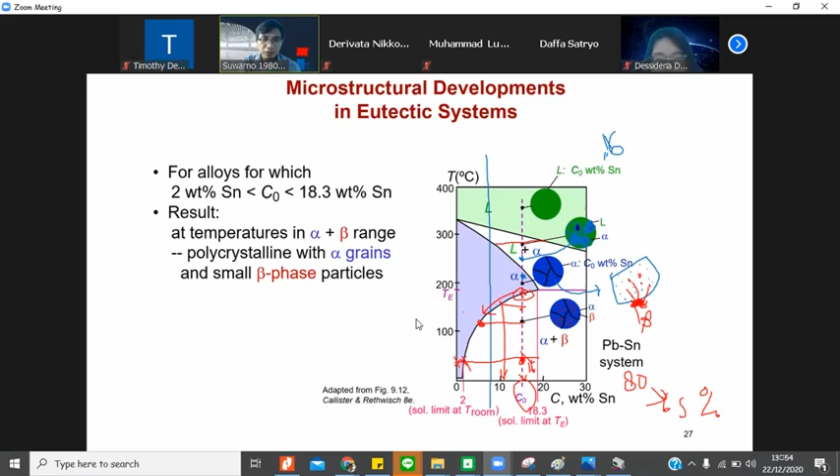Before we talk about eutectic, we come back a little bit to this copper-nickel diagram, and then we talk about the cooling curve. So what is a cooling curve? It basically tells you how the temperature decreases over time when some amount of alloy is cooled down. Okay, it is probably simple if you imagine something like this.

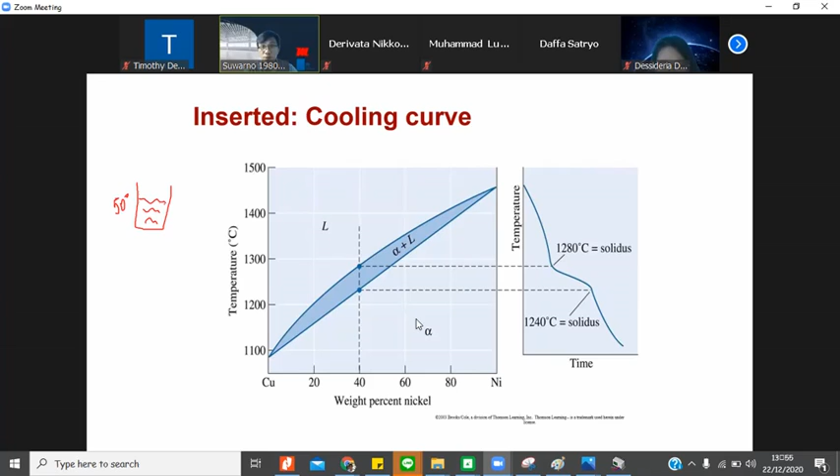So you have a glass of water, and this is about 50 degrees Celsius. And then you put a thermometer, or we call it a thermocouple in engineering language. In many engineering fields, people don't call it a thermometer; thermometer is for common use, but we call it a thermocouple. Thermocouple means a couple, because it's made of a couple of metallic things. It means you can measure the temperature here, in degrees Celsius.

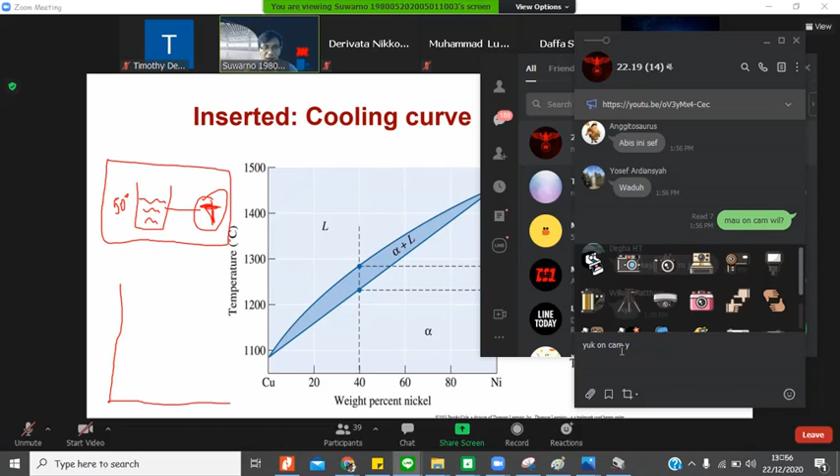So then I would like to make ice. I put this thing into a freezer, including the thermometer, or better, the thermometer is outside, something where you can read the temperature. Then I will make a graph telling me how the temperature progresses inside the freezer. So you have a plot: on the y-axis you have temperature, on the x-axis you have time. So this is a temperature and time diagram.

In the beginning, when it is started, it is 50 degrees Celsius. So then, when it is cooled down, you just monitor the temperature. It doesn't have to be manual; you can use a computer or programming. But let's say it's manual. You read this thermometer, and it tells you that it is 50, and then after 5 minutes it is 40. Every minute you record the temperature.

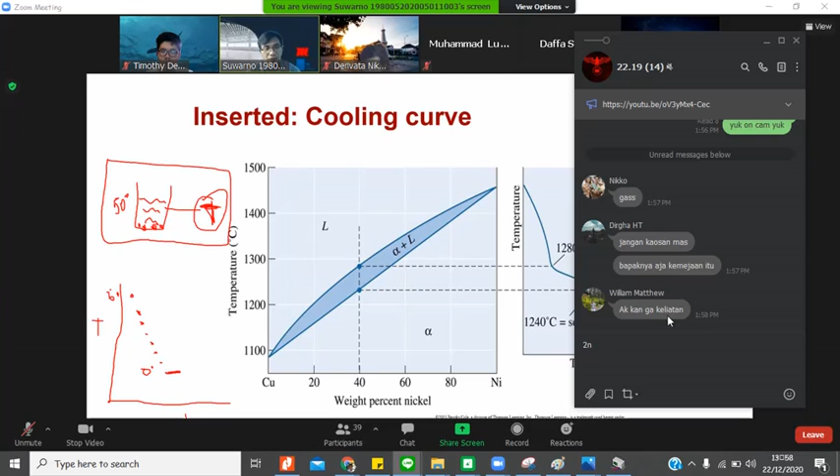It's cooling down: 50, 40, 30, 25, 20, 15, 10 and 0. This is the interesting thing. Whenever it is 0, at some point in your glass there will be ice formation, because 0 degrees is where ice starts to form. So what happens to your temperature now? After 5 minutes, you still observe the temperature is constant. It's still 0 degrees, no decrease of the temperature. And the amount of ice still increases, until 50% of your glass of water is now ice.

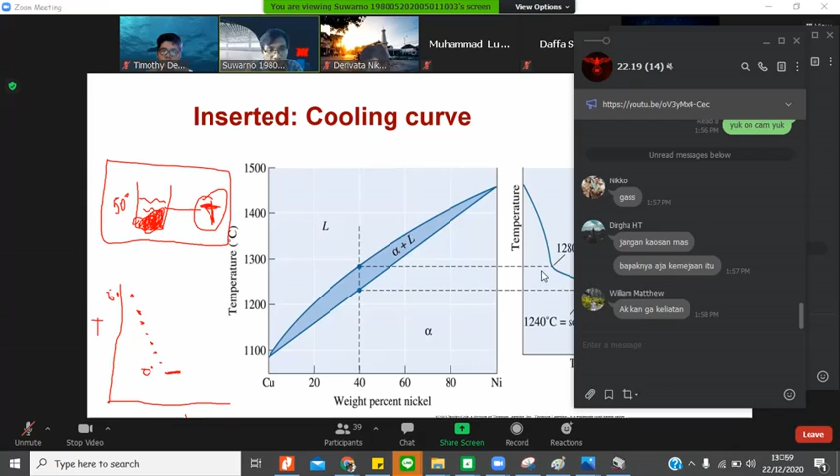Now my question: is the temperature decreasing, or is it fixed or constant at 0 degrees? What do you think? When you have a mixture of ice and water inside a freezer, when water is transformed to ice, do you observe the temperature decrease or stay constant? Constant. Yeah, correct. It's constant. Why? This is a phase transformation. During the phase transformation, the temperature is not going down.

It is still constant because it's pure. It's still constant until 100% of the water is already transformed into ice. Then it starts going down until minus 18 maybe, because the freezer is set to minus 18. So you have a diagram something like that.

So this thing, this curve, we call it a cooling curve. We call it the cooling curve of pure water. This is the cooling curve of pure water. If you have pure nickel, what happens? Liquid to solid nickel. Pure nickel is here. So this is pure nickel, this is pure copper.

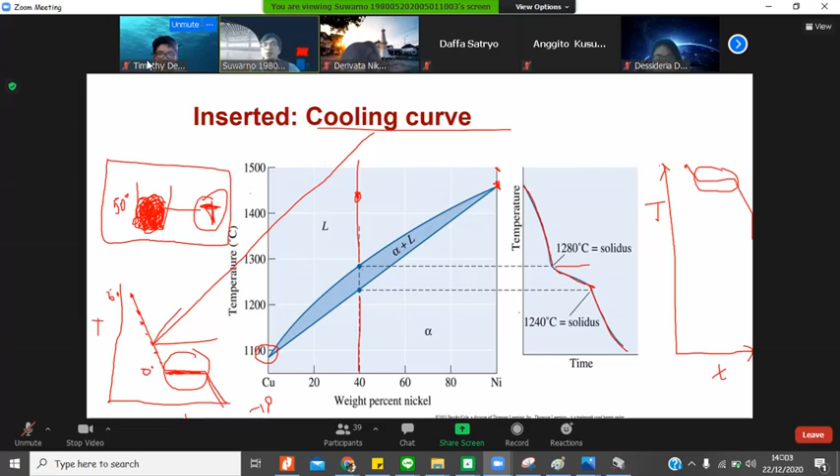So this is a cooling curve. Cooling curve tells you about the temperature progression during the cooling of a stuff. Or then you have a heating curve, when you heat stuff. Basically the same thing, not a big difference. Just monitor the temperature when you cool down something, a phase. It can be pure and can be not pure. Not pure means alloy.

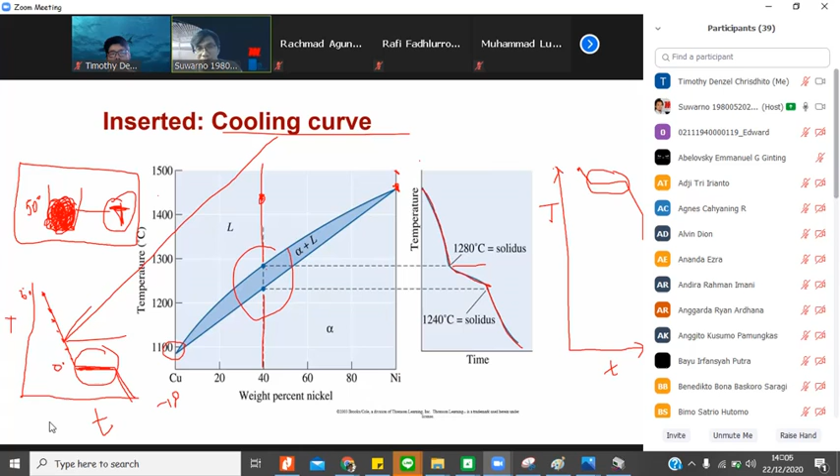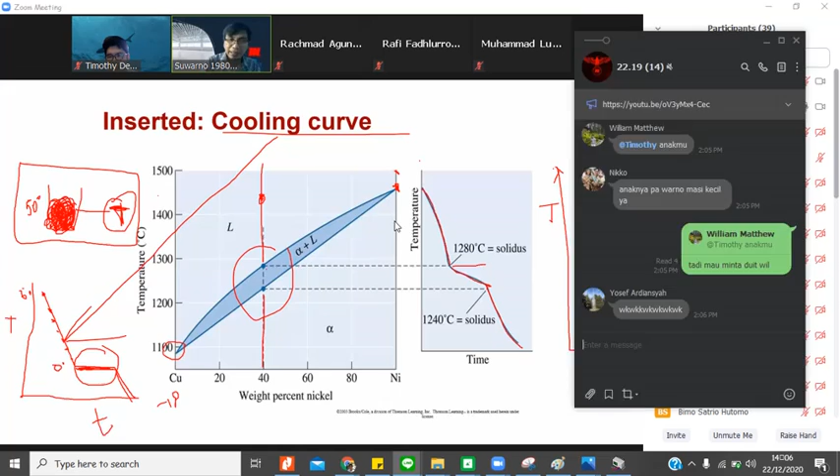So it will be constant at 100 degrees. There is no change because it's pure. Also, if it is condensed, then there will be some constant temperature, things like that. Okay, this is the same thing. I will not tell you. This is also the same.

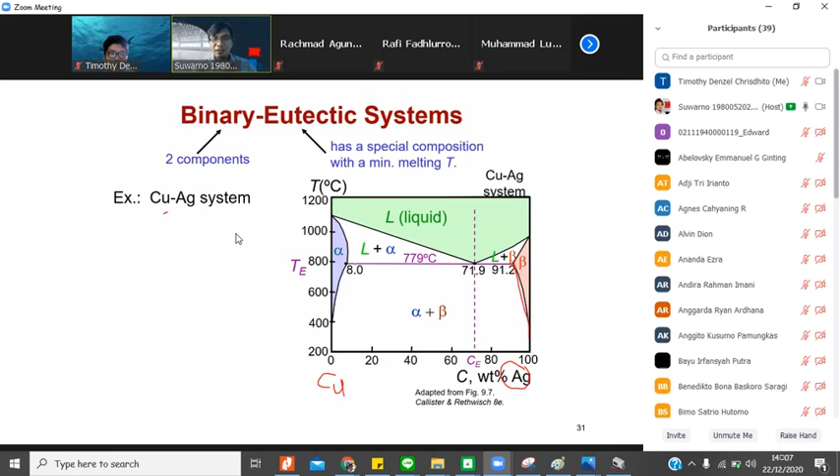So this is mainly copper on the left side, and then on the right side you have mainly silver with some amount of copper dissolved in silver. The amount of copper that is dissolved in silver is this line. So this is the solvus line of copper inside the silver, and this line tells you the capability of silver to dissolve copper. So it's mainly copper. And what does 8% mean? What is this? Maximum of what?

Maximum of silver inside copper. Okay. And then what is the maximum copper inside silver? What is that? What number is that? Maximum. So you have a copper, and then how much? Sorry, you have a silver here. How much copper that you can add?

At this, at 779 degrees Celsius. How much copper? 92%, sir. That should be 100 minus 91.2. See it? 8.8. Yeah, that's right. Yeah, 8.8% maximum solubility of copper inside silver.

So that's the kind of question that you will expect in the exam. So if you don't understand, then you probably should... I don't know, I didn't record it, but if you don't understand, you can just ask. Now there is quite a new story here.

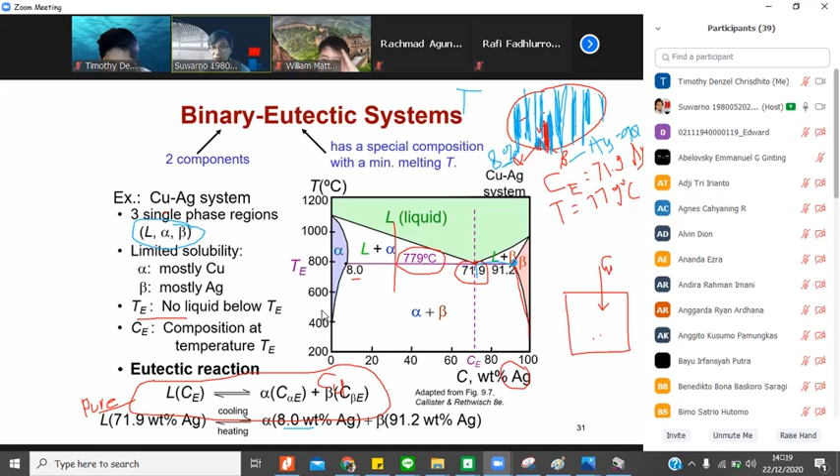Okay, let's make another example. This example is basically for the Pb-Sn system, and for the Pb and Sn system, this eutectic occurs at a different temperature and different composition. For copper-silver, it occurs at 779 degrees Celsius and 71.9% silver. But for Pb and Sn, it occurs at 61.9% Sn and at 183 degrees. So this line is 183.

So whenever this liquid reaches this temperature, what happens is that the temperature becomes constant. There is no change in temperature. If you monitor the temperature, there is no change at all until all the liquid transforms into the solid mixture like this. So you start forming something like this: alpha and beta, alpha, beta, alpha, beta, alpha, beta. And of course this is not a single crystal, so it doesn't start with just one. It can occur with 3, 4, 5, 6 crystals. So it starts here, meaning 3 crystals. Everything starts at the same time, and during this time there is no change in temperature.

Okay, until everything is finished, and then you start to observe the temperature decreasing. Before it's finished, the temperature is constant. So that's the idea behind the eutectic. So once it reaches that temperature, you get something like that. This is the final microstructure. You see this is alpha, beta, alpha, beta, alpha, beta, something like that. Okay, this kind of structure, we call it lamella.

Lamella, something like this, this is lamella. In real life you observe something like that, like layered cabbage or a layer cake. So we call it lamella microstructure, the lamella structure.

So if I write this into some kind of writing: if you have a liquid with composition of 61.9% Sn, at temperature 183 degrees, what happens? It will transform to a mixture of alpha with the composition of what?

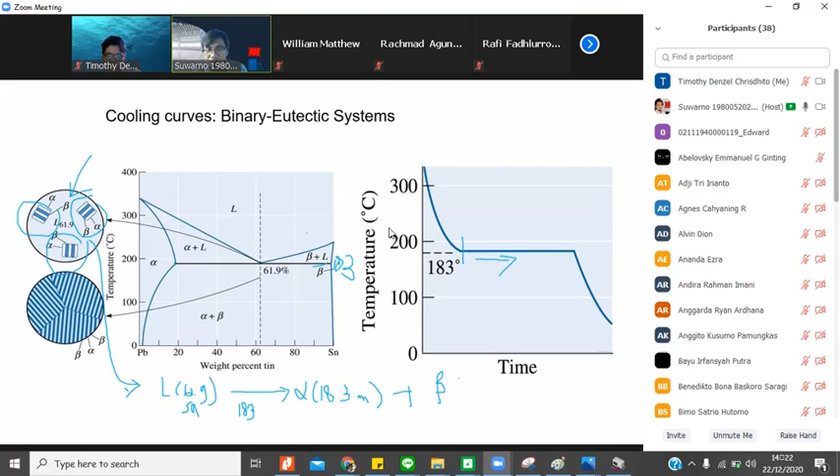See here, something like that. Maybe it's about 18.3 here. 18.3 Sn plus beta, maybe 97%. 97% Sn.

And the temperature is not decreased. It means it's constant until all the liquid is transformed into the mixture of alpha plus beta. Okay, this is eutectic, and then the eutectic reaction occurs.

That is a very important concept. Eutectic reaction will occur anytime whenever the alloy composition is this one, 61.9. That's why, because liquid can experience this composition, this line is something like this. So if you meet this line, this is the eutectic line.

We will discuss a little bit how it is happening. You see that if you have a reaction at 183 degrees, the liquid is transformed into alpha and beta. So what happens is that because alpha cannot accept Sn anymore, then Sn should go to beta. But Pb should be going here because beta cannot accept Pb anymore.

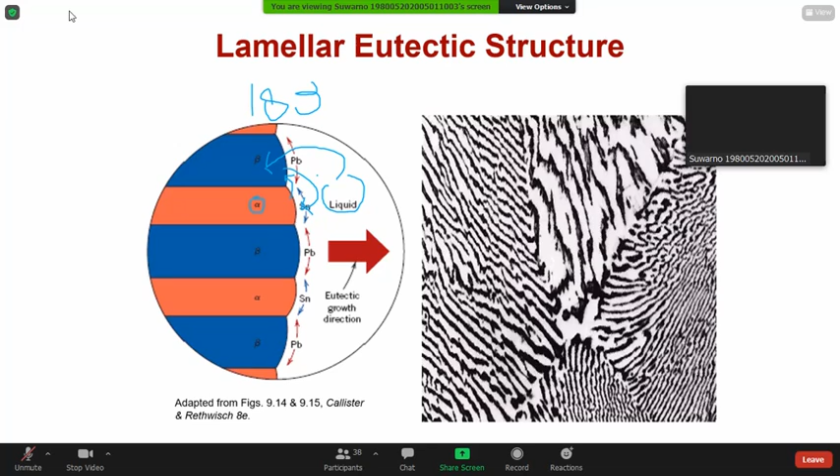And the temperature is not decreased until everything is transformed, until all the liquid is transformed. Understand? And we start with this.

A bit challenging to follow this. Hypoeutectic - what happens if you have a line like this, a composition like this? Something like this. If you have something like this, you already just learned - you have a line like here, and you just learned how it is transformed.

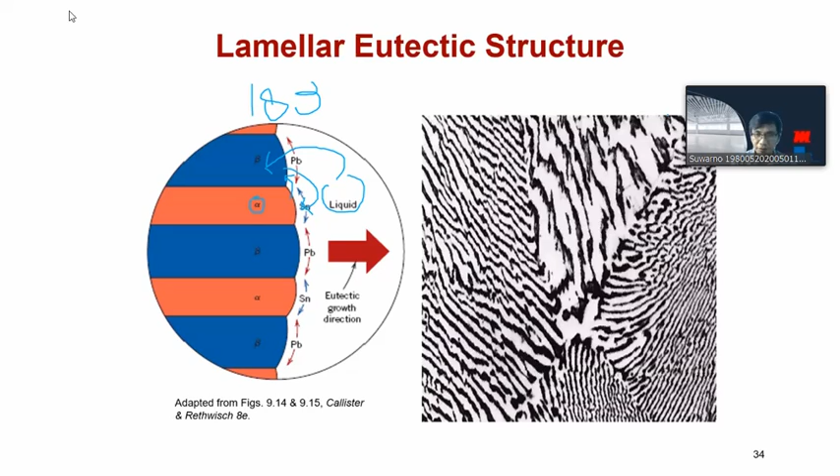So just liquid, and if it is liquid at 61.9 weight percent Sn, then the liquid will transform into the mixture of alpha and beta. You see here. But if the composition is somewhere about 30 weight percent Sn, what happens now when this thing is cooled down?

Then it will experience some transformation here, alpha formation here, and then also eutectic reaction here. That is quite complicated, but you can follow it if you already understand this thing.

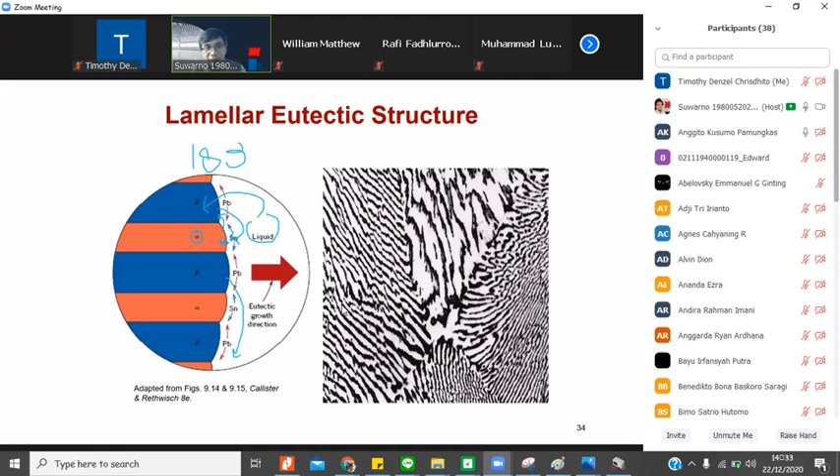Any other question? Okay.

The important thing is that the composition inside the liquid is always constant. In this eutectic system, it is always constant from the beginning. So from the beginning, it is how much? It's 61.2, 61.9 probably. Yeah, it is constant all the time.

So everything means that this is random atoms of liquid solution. Random ya kalau liquid solution.

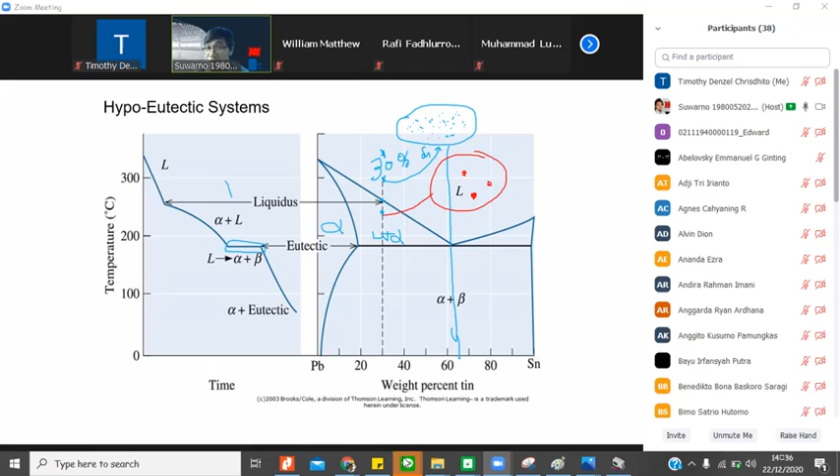This is alpha, and you can calculate, of course, how much alpha, how much liquid, inside a mixture of alpha and liquid at this temperature. This temperature means about 250. Yeah, you just read this. How much this? This is about 250 somewhere here.

So if you keep going down here in temperature, it means a lot of alpha will form. Okay, let's go down here. So you see what happened now? The amount of alpha is increased.

So now the question is, inside this alpha, how many SN now? Is it 30% or not? How many SN here? How can I know SN here?

You can just follow the tie line diagram or lever rule diagram. You see that you can make a line here. Everything in the alpha, which means this is the composition of alpha. So the amount of SN you can read from this. Okay.

Amount of SN inside alpha, yeah, and alpha, you can just read here, going down here. This number is probably 18. Just 18 now, 81.

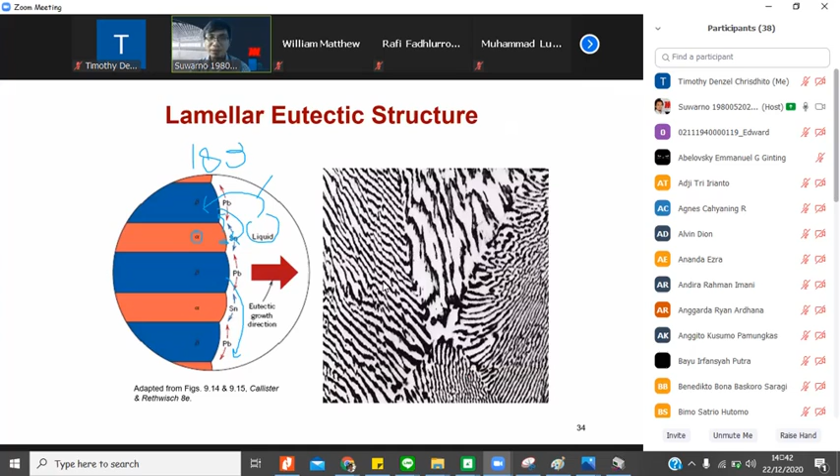So if we have a composition of 61.9 Sn inside the liquid and the temperature is 183 degrees, composition is 61.9. What mechanism do you have here? What transformation do we have now? What kind of transformation is that? You should have eutectic transformation. So what does it mean? It means that the rest of the liquid should transform following the eutectic transformation. So the rest of the liquid here, that means that you form alpha and beta

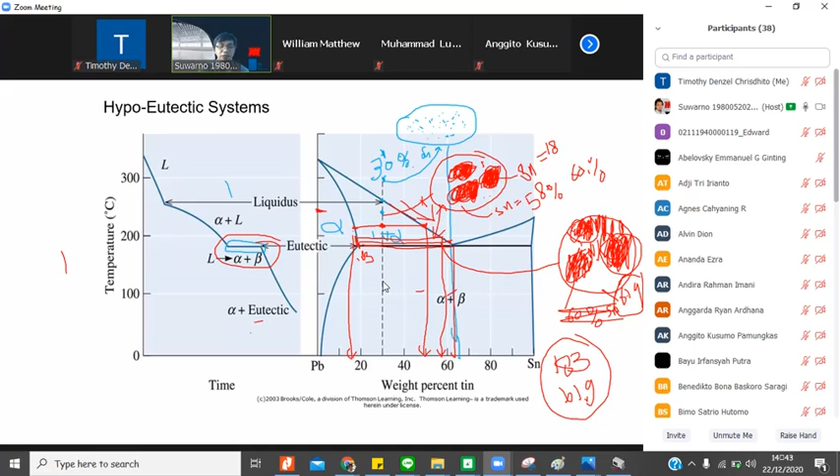If you have a temperature at this point, you will have a formation alpha, beta, alpha, beta, alpha, beta. The rest of the liquid, because the liquid composition now is 61.9. So then the temperature is not cooling down. It is constant. That's why it is written here. It is constant here, and there will be no change of the temperature before everything starts to form the eutectic. So the microstructure here is the eutectic and alpha. So it's alpha plus eutectic here, alpha plus beta, at this point. Later on we will calculate how much alpha and how much eutectic.

So every time the liquid is composed of 61.9, which can occur at this line, along this line, what happens is the eutectic transformation like this.

If you have it on the right side, then the story will actually be the same. A different kind of composition, but really the same. And the main phase here is not alpha but beta. So then you have something like this. You have beta, and then you have eutectic here. Okay.

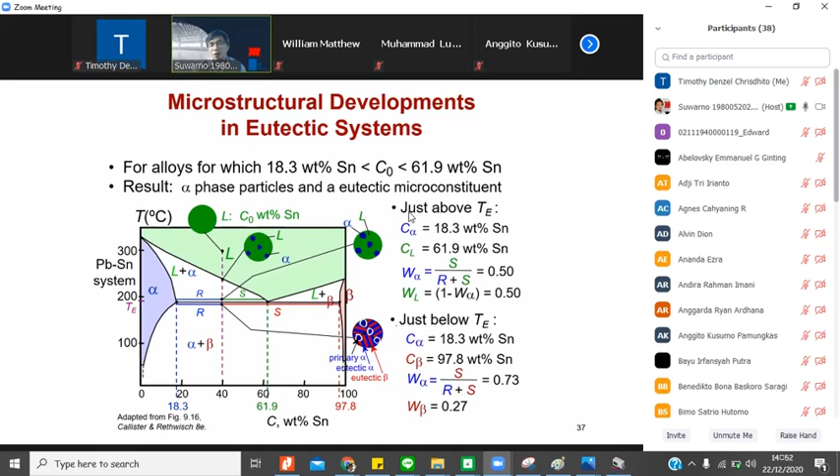Let's first try to understand that, and then later on I will discuss how to calculate if you have something here, for example. It will be different how to write it or to calculate. So the eutectic microstructures look like this. Sometimes the lamella is a little bit larger or smaller, it depends. It's not really equilibrium. So then we have two kinds of terms.

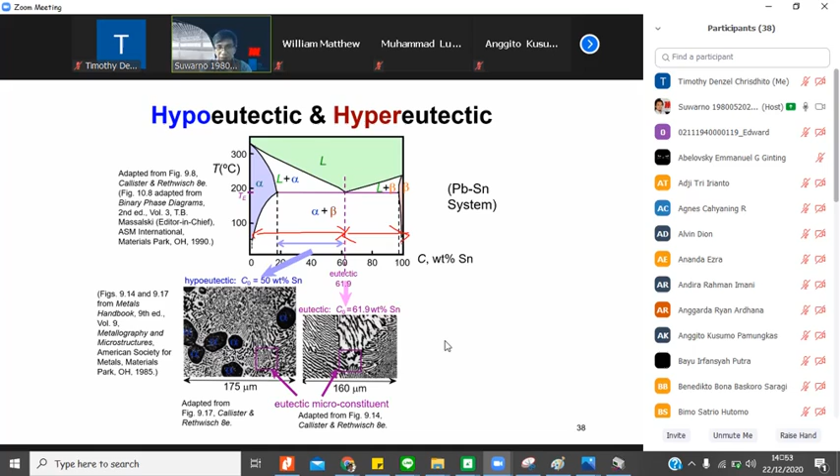We call it hypoeutectic if it is somewhere here. If something is here above the eutectic composition, we call it hypereutectic. Some people define it somewhere here, but something below the eutectic composition we call hypoeutectic, and above it hypereutectic. So this is not correct. It's not until here. It's until here and here, because below this you don't have eutectic composition.

And then the eutectic is on this line. Something wrong here, so I should erase. Okay, so this is hypoeutectic, this is hypereutectic, and the eutectic is occurring on this line, for all this composition. And here, as we already discussed last time, there's no eutectic reaction. Why? Because there's no line here.

And then the composition, you see that there will be alpha, which you form here. This is the eutectic reaction that occurs at 183, and this is eutectic, and this is hypereutectic, and this is beta, because this is beta here. So the story is completely the same as with the hypo, with the difference that the pro-eutectic phase is beta now, not alpha.

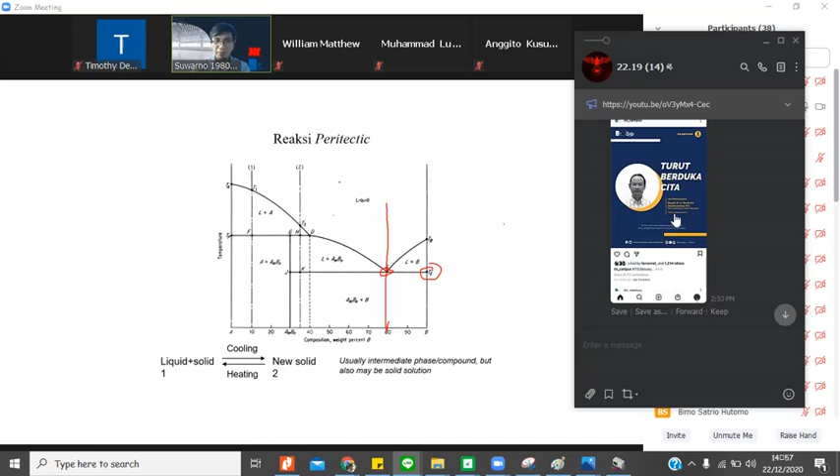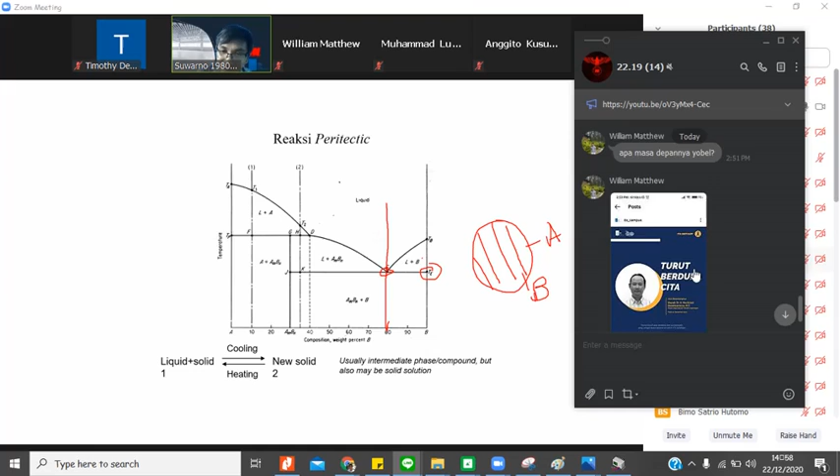So what happens is you will have lamellae of A and B. Sorry, not alpha and beta, because there's no solid solution. This is A and this is B. So this is only a mixture of A and B. A is like aluminium, or B is like boron, for example, or any element that is solidified in this regime.

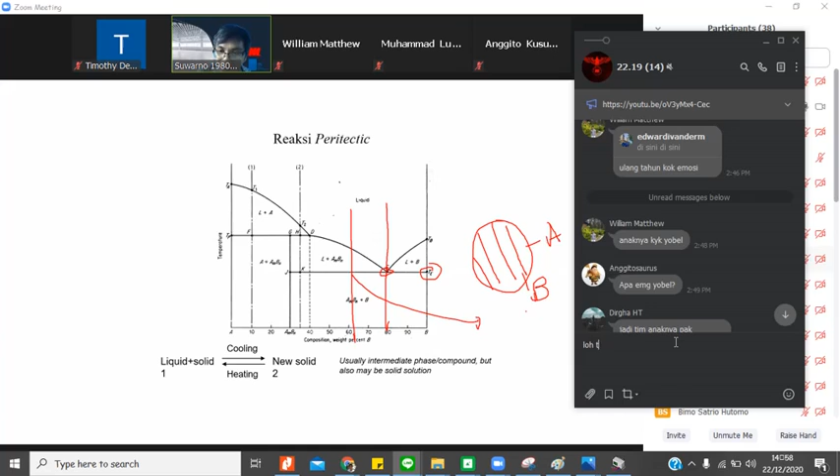But if you have something like here, what is the microstructure here? This is called intermetallic.

Basically, this is not a solid solution, but this is a compound with a ratio of M and N. This is a number of M and N. This is basically compounds, so this is a regular arrangement. So A and B cannot dissolve each other, but they can form some kind of compounds.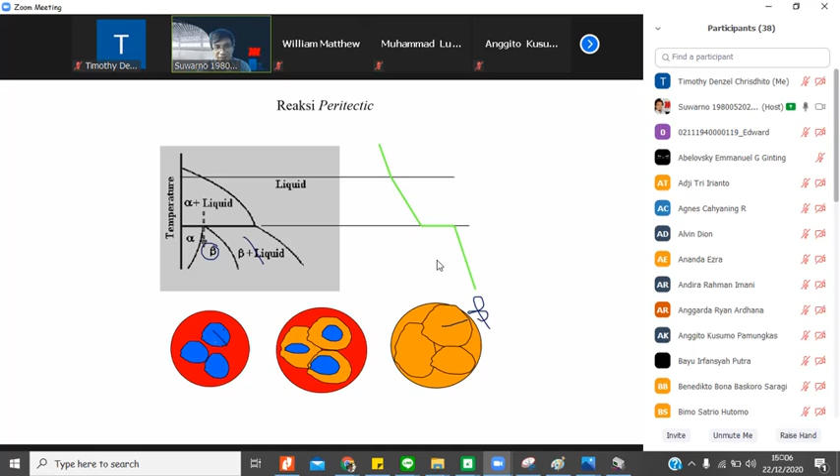Begitu dia kena diturunkan mendekati temperatur ini, we will observe that the blue one will transform into beta, into beta. And there is no liquid, all the blue will transform into the orange one. So in the end you will have beta. Tidak ada alpha lagi. So the transformation like this, liquid plus solid, you have new solid. We call it peritectic reaction.

So you have liquid in red and blue in solid, and then liquid is transformed to orange, and blue is dissolved to form the orange, and then you start a new solid, something like that. In the end you have all the orange microstructure, and this is peritectic. Okay, that's a bit complicated, but let's make some review.

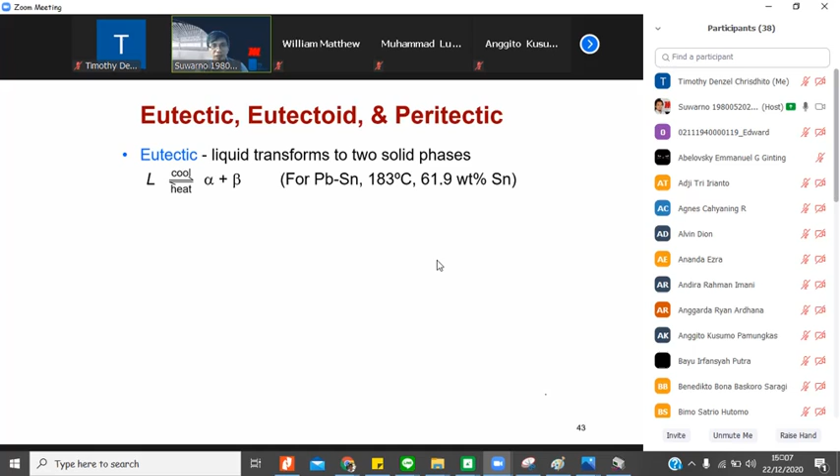So eutectic, it is something like this: liquid transformed to solid, liquid to alpha plus beta. Eutectoid is solid to solid. So what does eutectoid mean? It's solid now. So it is liquid to solid. But if it is solid to solid, you call it eutectoid. If it is liquid to solid, you call it eutectic. Okay, and then also peritectic.

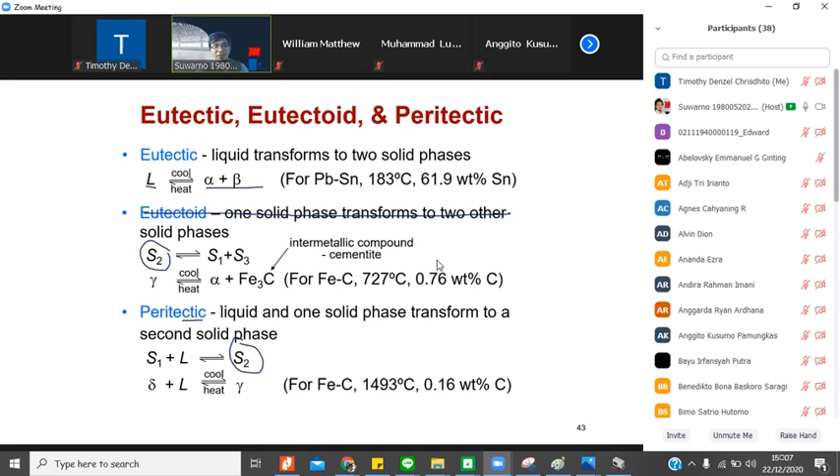If it is solid plus liquid, and this is new solid, right? If you have solid 1 plus liquid, you have new solid, you get peritectic. But if you have solid 1 plus solid 2 and become solid 3, then you have peritectoid. Okay, so basically that's a complete reaction. You have something like this.

So you have alpha and beta here, liquid here, and constant temperature here. You have liquid transform to alpha plus beta, and this is eutectic. Liquid to alpha plus beta at constant temperature. This is eutectic. If you have alpha plus liquid, and alpha plus liquid transform to a new solid, which is beta, then you have peritectic.

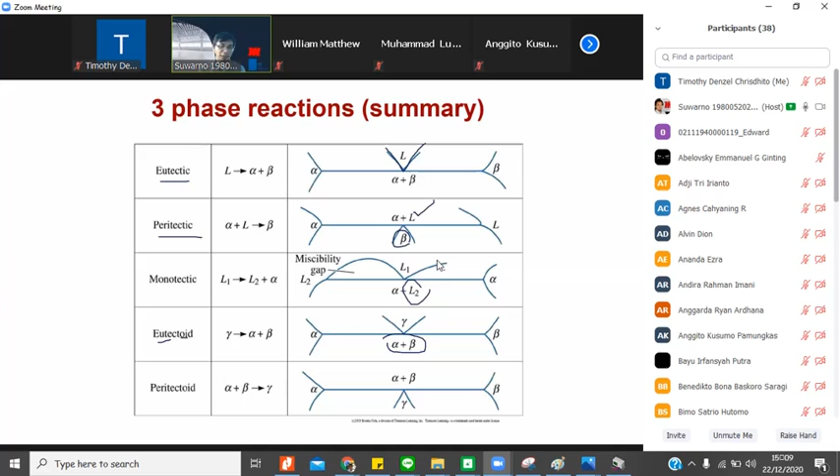Remember, -tic is liquid, -tic is liquid, monotectic, something like this. So if you have liquid transformed to alpha plus liquid 2, there is still liquid, you call it monotectic. If you have gamma, which is solid, into 2 solids, you call it eutectoid. If you have alpha plus beta, which is solid, into new solid, you have peritectoid. Basically, -tic is liquid, -toid is solid.

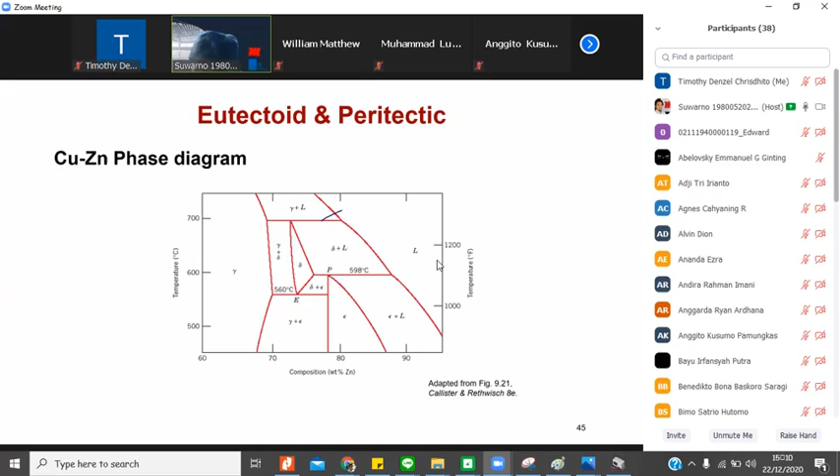Okay, a bit challenging, but you can learn by yourself in my notes on the internet. Please, this is an exercise. Can you do that? A bit not easy, but you can do that. Please do this exercise. I will put the link on the classroom. The deadline will be next week on Monday. Okay. Any question?

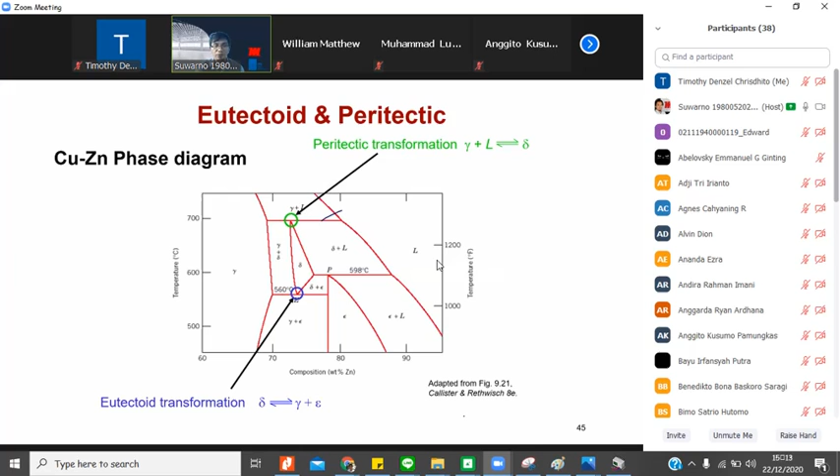Any question? As long as up to this point you understand, the rest you can learn yourself. You can learn from the practice also. We will discuss a bit of detail about this from the practice. Then maybe 1 or 2 persons can start to explain.

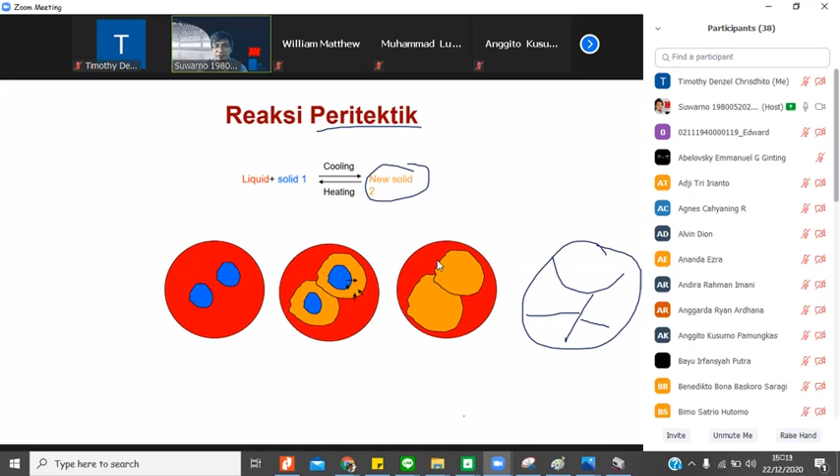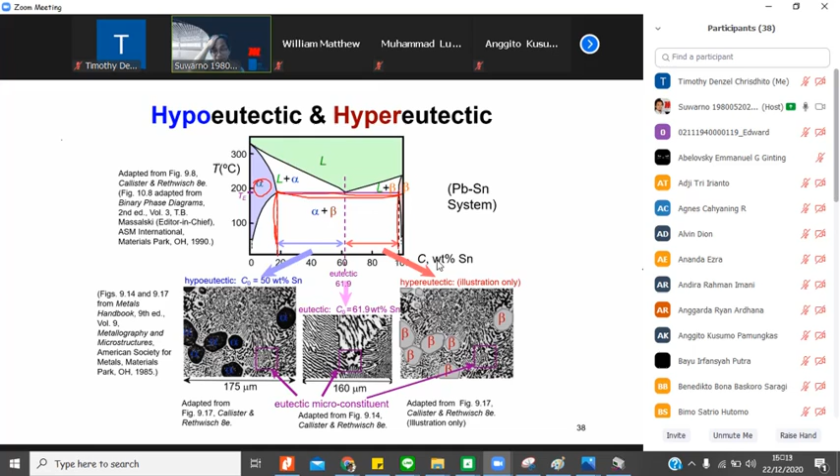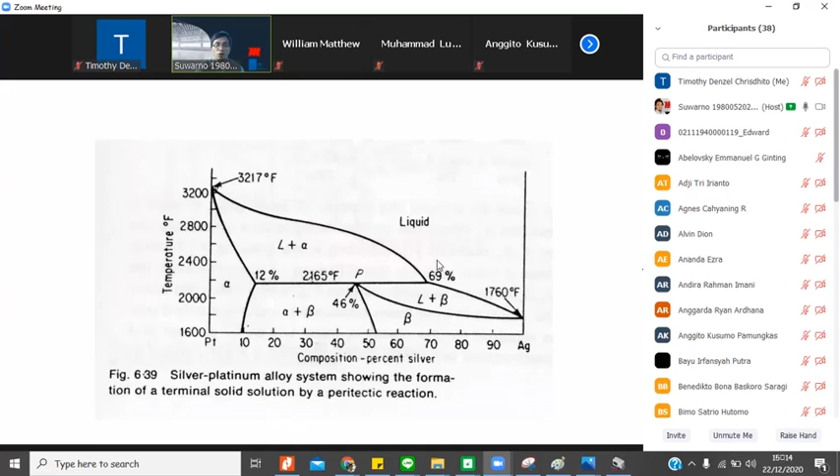Okay, if there is no question, then we can close the lecture. So submit Monday for this practice. Does everyone understand the practice homework? Just write in your paper and scan it and put it in the classroom. Okay.